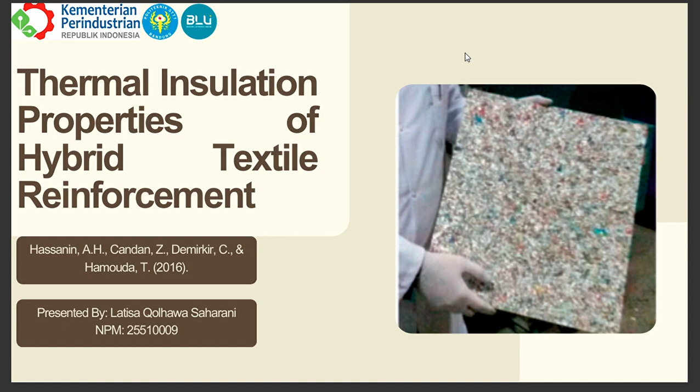The main problem addressed in this study is the environmental issue of Tetra Pak packaging waste. Tetra Pak is a composite of paperboard, plastic, and aluminum, which makes it very difficult to recycle and causes large accumulation in landfills. At the same time, there is a growing need for sustainable insulation materials to replace petroleum-based synthetics commonly used in the construction industry.

Therefore, this research aims to find an eco-friendly solution that reduces the environmental impact of non-biodegradable packaging waste, supports energy-efficient and sustainable construction materials, and promotes the circular economy by recycling both food packaging and textile waste.

This topic is important because it contributes to both environmental sustainability and material innovations. By turning waste materials into valuable composites, we not only minimize landfill waste but also create products that can save energy in buildings. Furthermore, such hybrid composites align with green building initiatives and zero waste manufacturing trends, making them highly relevant in modern industry.

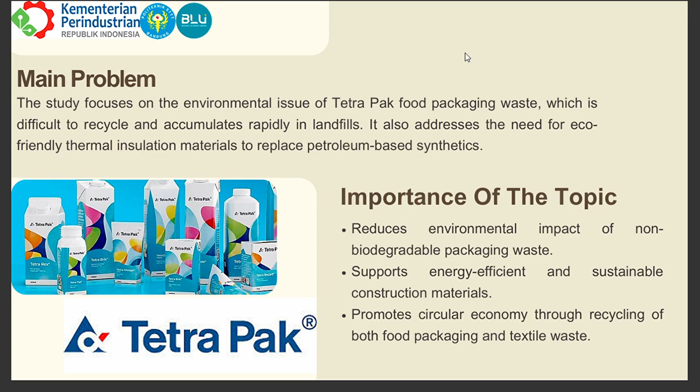We move to the next slide. This is the previous research. The previous research has shown that natural fibers such as jute, hemp, bamboo, and cotton possess good thermal insulation capacity. These fibers are commonly used in the automotive and construction sectors as eco-friendly materials.

However, the use of Tetra Pak waste as a core material combined with textile fibers as surface layers is still rarely explored. Thus, this study introduced a new approach by hybridizing Tetra Pak with wool waste and reinforcing it with woven fabrics to enhance its insulation performance.

The objectives of this study are to develop hybrid biocomposites made from Tetra Pak waste and wool waste with improved thermal insulation by first varying the wool fiber ratio and second reinforcing the composite with either jute or glass woven fabrics as outer skin layers. The ultimate goal is to identify the best material combinations that achieve low thermal conductivity and high resistance, suitable for insulation applications.

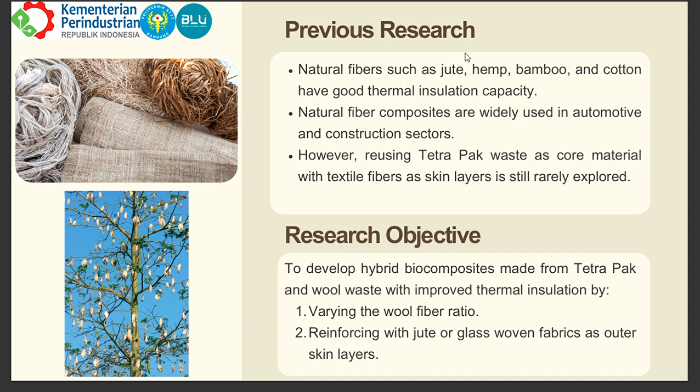So this is the research flow. This research follows four main steps. First is material preparation. Tetra Pak and wool waste were collected and shredded. The shredded Tetra Pak exposes cellulose, polyethylene, and aluminum layers, while wool fibers were cleaned and cut for blending.

Second, fabrication of composite panels. The mixtures with various wool ratios, around 0 to 20%, were layered with jute or glass fabric as outer skins, using a hot press at 190 to 200 degrees Celsius and 2 to 10 bars. The LDPE inside Tetra Pak melted and acted as a natural binder, forming solid hybrid panels.

Third, thermal testing. The samples were conditioned at 20 degrees Celsius and 65% relative humidity, then tested using a FOX314 heat flow meter to measure thermal conductivity and resistance.

And the last, data comparison: the obtained results were compared with commercial insulation materials to evaluate performance. In short, the process converts packaging and textile waste into eco-friendly insulation composites through a simple and efficient workflow.

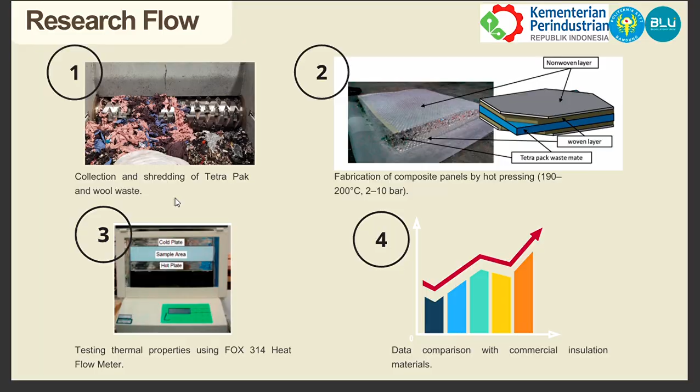This is the material they are using. The materials used include Tetra Pak waste containing approximately 75% of cellulose, 20% of low-density polyethylene or LDPE, and 5% of aluminum. And the second is wool waste fibers.

It's collected from Yunsa Textile Factory in Turkey. And the third was glass woven fabric and jute woven fabric used as the outer skin layers. And the last is polypropylene non-woven, used as an additional bonding layer between the core and the skins. Each component was chosen for its recyclability, thermal behavior, and compatibility in composite manufacturing.

The main equipment and methods that they are using is hot press molding machines that operated at 190 until 200 degrees Celsius and 2 until 10 bar pressure to fabricate the composite sheets. And they are using the FOX314 heat flow meter used to measure thermal conductivity, resistance, and related properties.

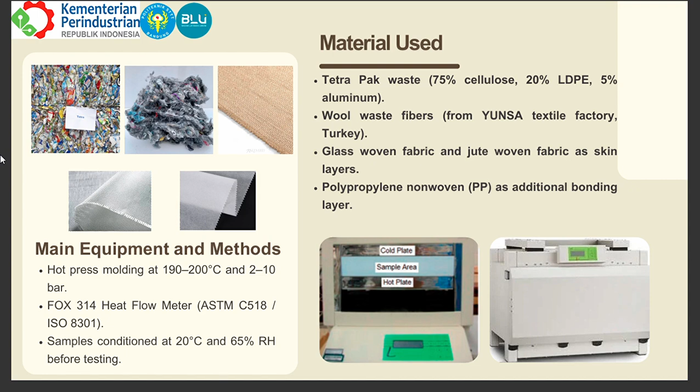Before testing, all samples were conditioned at 20 degrees Celsius and 65% relative humidity to ensure uniform moisture content and accurate results. This is the experimental parameters. The experimental parameters are summarized as follows. First is wool fiber ratios. They are using 0%, 5%, 10%, 15%, and 20%.

And the second is skin types. They are jute, glass, polypropylene, jute plus polypropylene, and glass plus polypropylene. And for the measured parameters, they are measuring 4 parameters: thermal conductivity, thermal resistance, thermal resistivity, and thermal conductance. This measurement allows the evaluation of how fiber content and surface reinforcement affect the heat transfer.

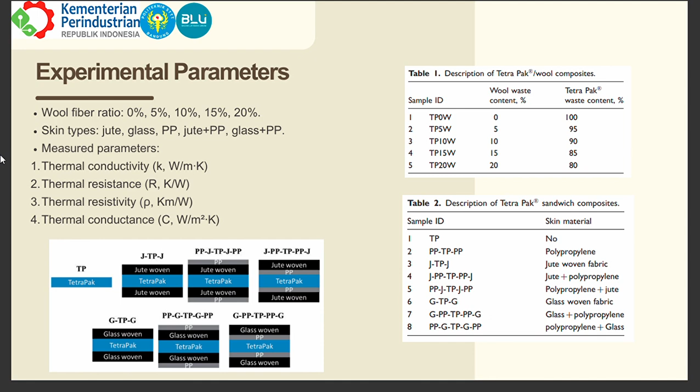Okay, we move to the next slide. This is the result, figure 1, the thermal conductivity of Tetra Pak wool composites. The thermal conductivity decreases as wool content increases, reaching the lowest value at 15% wool, around 3% lower than 0%. The improvement occurs because wool fibers create air voids that trap heat. A slight increase at 20% may result from fiber agglomerations.

And in figure 2, there's the thermal conductivity of sandwich composites, or the effect of skins. First, the glass fabric skins give the best insulation, around 8.5% lower K, followed by jute skin at 6.7% lower. Second, polypropylene layers mainly improve bonding, not insulation. And last, glass fabric reduces heat flow due to its dense structure, while jute offers a natural porosity.

And in the last figure, it is thermal resistance and conductance. Higher resistance, R, corresponds to lower conductivity, K. The glass skin plus 15% wool composite shows the highest resistance and lowest conductance, proving it is the best insulator. Overall, increasing natural fiber ratio and adding proper reinforcement layers clearly enhance insulation efficiency.

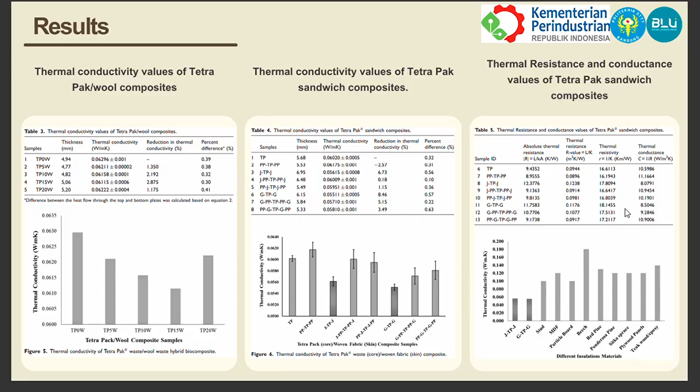Okay, so this is the key interpretation and relation to literature. The results align well with heat conduction theory in porous materials, where air voids reduce heat transfer. Wool's crimp structure helps to trap air, while glass and jute fabrics act as barriers that limit heat flow across surfaces. These findings are consistent with Vigneswaran in 2009 and Kawasaki and Kawai in 2006, who also found that fiber-based composites lower thermal conductivity through increased porosity and interfacial resistance.

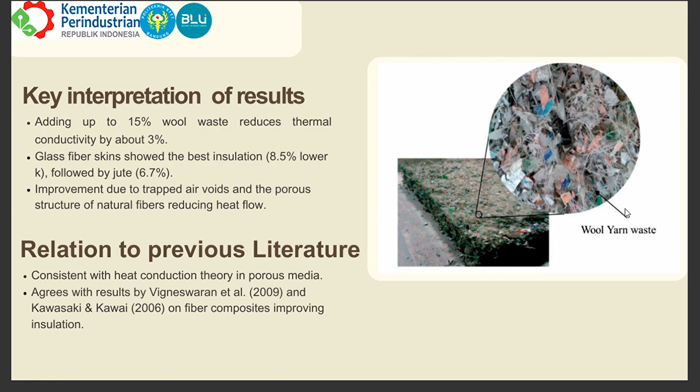The proposed approach supports the waste-to-resource concept, contributes to green building technologies, and aligns with global efforts for environmental sustainability.